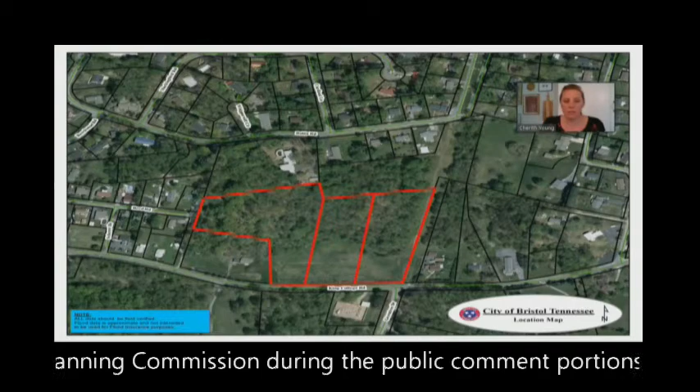The next slide shows the location map. The parcels highlighted in red are the parcels under consideration tonight. This may look a little familiar to you - the Planning Commission approved a subdivision plat for this about 2.5 years ago. So this is 3 of the 5 parcels that were approved by the Planning Commission. The other 2 parcels have been sold to other owners, so we have the 3 parcels in red here tonight for Mr. Taylor's project.

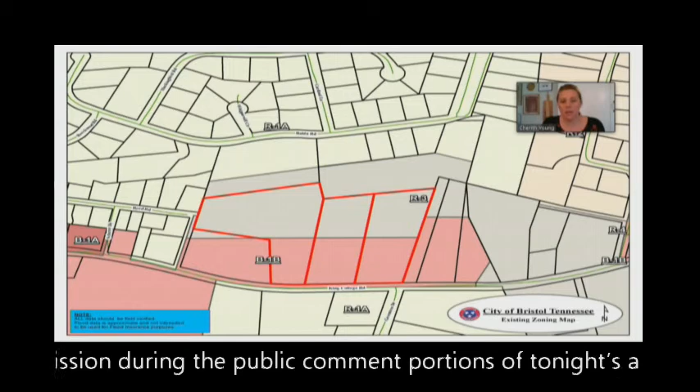The next map shows the zoning of the property, and you'll see that these 3 parcels are split zoned. You have B1B across the front of the property along King College Road, and then R3 in the rear of the properties adjacent to the residential area along Rock. So there is some split zoning here for this project.

The next slide shows the property use and zoning adjacent to these parcels. To the north, R1A, low density residential - single family homes in that subdivision. To the south is R1A, low density single family residential, with the land use being single family residential, and you also have the BTES substation across the street. To the east is zoned B1B and R3, vacant and residential. And to the west, B1B, also a single family residential use on the property to the west.

Just quickly to recap why this is coming to you all as a special use application: this is a commercial zone along the frontage of King College Road, so it's B1B. The B1B district is to accommodate some light commercial and office uses located near residential areas. On the slide, you'll see a summary of some of the permitted uses that would be allowed out there today. So if Mr. Taylor was going to do single family residential, office use, restaurant use, or healthcare uses, those would be allowed today. His process would be to go through the site plan application process and then the building permit process, but those would be permitted uses outright.

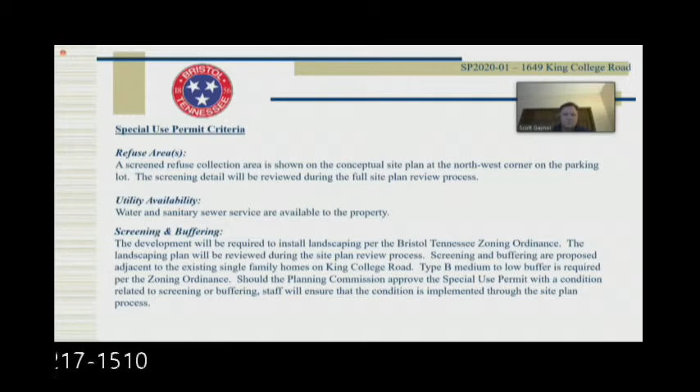As far as utilities go, water and sanitary sewer service are available. For screening and buffering, the zoning ordinance does require screening and buffering on residential uses. The type landscape buffer that the zoning ordinance sets out is called the type B, medium to low buffer option, and that is acknowledged on the concept plan, not in great detail, but they have acknowledged it will be required along those residential property lines.

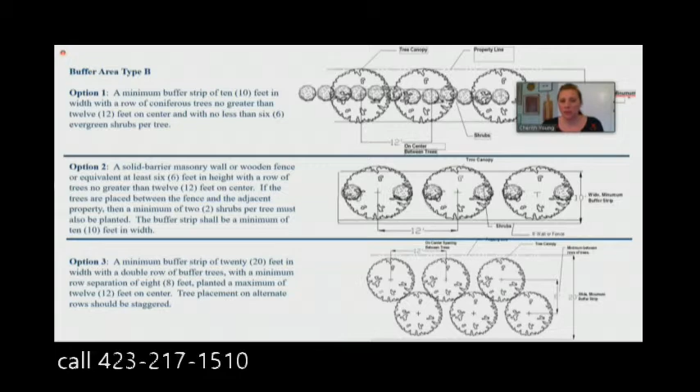Here is a slide that shows what those options are, and you've all seen this a couple times when we looked at special use permit applications. This is one of the areas that the Planning Commission can look at for the special use permit, but the landscaping is required through the site plan application process, and we will be looking to see at a minimum that it meets all the landscaping chapter requirements.

Next is lighting and signage. As part of the site plan package, they will require a photometric plan if any lighting is proposed, and that will have to conform with the city's lighting ordinance.

Setbacks and maximum lot coverage: according to the B1B setback standards, the project does fall within the setbacks allowed in this district, so it meets all the front, side, and rear yard setbacks.

Public notification: we ran a public notification ad on this project in the Bristol Herald Courier on April 1st, 2020. We placed public notification signs on the property, and adjacent property owners were notified by letter, and they were also sent a comment sheet to reply back to us with their opinions, either in favor or opposed to the project.

So we did receive several calls and several emails about this project. Several were just in the nature of 'can you tell me what's going on' - they were curious about the project. We received one of the adjacent property owner letters back that was in favor of this special use application, but we received two correspondences from people within the adjacent property area that were opposed to the project.

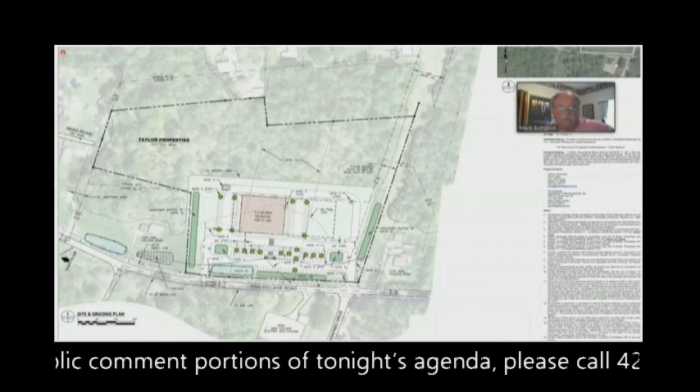That's what I wanted to get out there. So let's turn it over to the Planning Commission to ask any questions of staff. One of the questions I have: the special use permit would be for this only. So if they decided not to do this, do something else, the special use would be null and void, and they couldn't do it unless it fell under the criteria of the zoning that's already there.

Right, so if this is approved or not, and Mr. Taylor sells the property and does not want to pursue this use, he could build a commercial strip center with any of the permitted uses on that list without Planning Commission review.

Mr. Chairman, I have a question. I noticed in the objection somebody was concerned about the right-of-way going up to Forest Hills from King College Road. I see on the site plan there is a right-of-way there. Who owns that right-of-way—is it a city right-of-way or a private right-of-way? There's an existing BTES electrical easement up that side. There's not an active line currently along that property line, but there is an existing electric system easement there.

Could that easement be used for a roadway? I would hope not. Well, it could with the electric system's permission, yes. It could be made into a city street. Well, I don't know—that's a long ways down and would have to look at what the proposed use would be behind there, but it's a possibility if they wanted to subdivide the property behind there and needed to put in a public road or a road to a public standard. That could be a possibility.

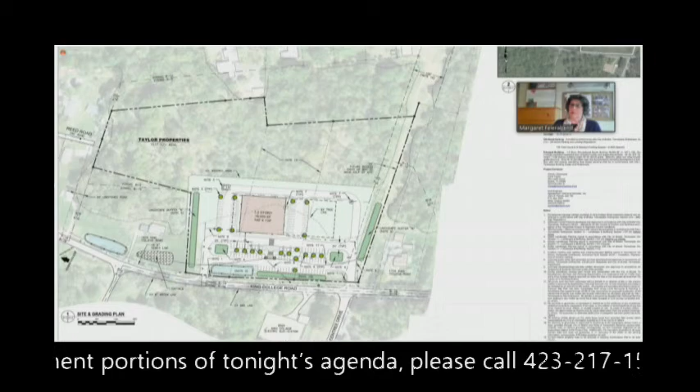But at this point unlikely, correct? That's not requested at this time by the applicant. But they would have to have BTES's approval since they have the right of way, correct? BTES would have to grant permission to put a road or driveway across that easement, yes. Also, that possibility exists whether this is approved or not, is that correct? Correct. So do I not remember that BTES had some high-powered lines going up that easement at one point in time that are no longer there? That is correct.

All right, any other questions at this time? With regards to the letter where they were opposed to something happening to the pond—there's no plans for that pond to go away that I can see right now, is there? Well, regards to drainage and water quality off the proposed site, they would have to meet our current regulations regarding stormwater runoff and water quality, since this site is over 1 acre. So they would have to work, and have been working, with our city engineer on water quality features as well as looking at potential detention for runoff.

Yeah, this is Scott. Along those lines, on the site plan, note 17 is a bit of an eye chart, but it says it's a blue line tributary of Cedar Creek, and I don't see any kind of creek or water feature from the aerials or on the site. So what is that, subterranean—is that just a ditch? What is that? The blue line is USGS, basically drainage ways they put on USGS maps. They call them little blue lines because they indicate drainage areas. That does not mean there is a stream there; it just means they consider that a drainage way.

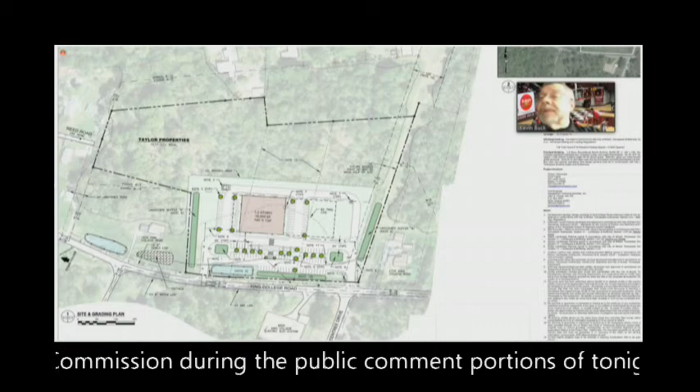Without any other questions for staff right now, what we will do is ask the folks that are part to address the Planning Commission. Then after we do that, we'll come back and look for a motion unless there are other comments we need to clarify. So who do we have first?

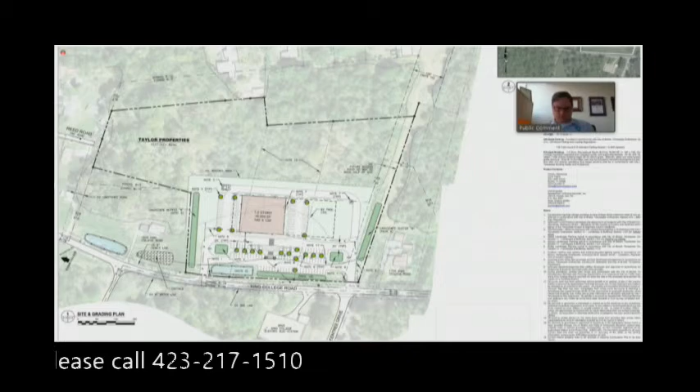Whether it's a special use permit, right? Whether it's a special use permit or just any development, be it subdivision or commercial or industrial, any development. Yeah, right. Okay, please go ahead.

Another concern I have is with what would happen to my property value. Personally, I wouldn't want to live next to a development of that sort, and I've got small children, dogs, wildlife, and whatnot. Anyway, I cannot see this not negatively affecting my property value to the point that I would be stuck here, because who would want to live next to that? So that's another one of my big concerns.

And then there's, like Miss Wright mentioned, the wildlife that lives in these woods. Anybody that drives through here in the morning could tell you there's 20 to 30 deer out here 4 or 5 times a week. We've got raccoons, coyotes I've seen. There's just an abundance of wildlife. We've got great blue herons in here, things of that sort.

But mostly the two biggest for me would be my property value and the sheer amount of water that would run off of that parking lot and the facility itself. Water drains downhill, and I am downhill. So I'm really more interested in what the water retention and detention systems would be.

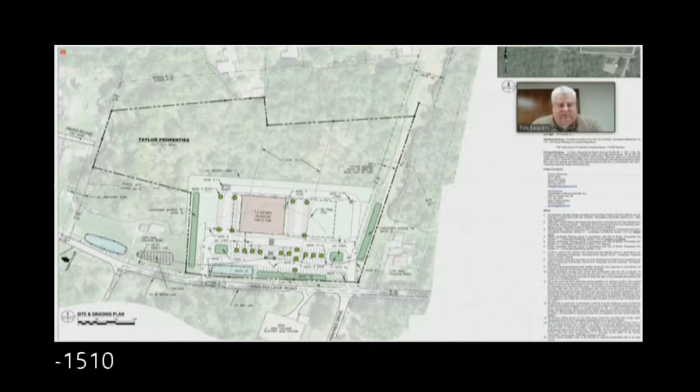So I think that in the event of a Dave and Buster's, we'd probably just have to take it case by case. A Dave and Buster's would have a big restaurant component, a big food component, and they might fall under restaurant and they might fall under sports club.

I've thought a lot about why this is listed the way it is in the special use permit list. A sports club and how it impacts the residential area would be a lot like if it was tennis courts outside - do they have lights, are they going to have play at night, are neighbors going to have to listen to the whack of tennis rackets all day long? This one is indoors, so you're not going to have extra light, or again back to that criteria of what the planning commission looks at - you're not going to have those concerns at play. I understand the neighbors' concerns, but from the special use permit thought, you're not going to have those noise or light concerns.

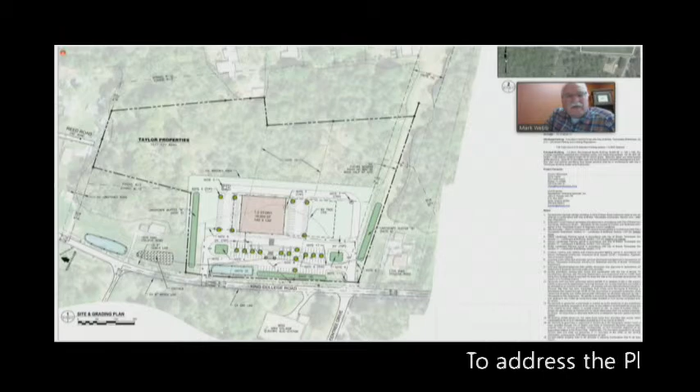Correct. I also see to the right of the middle parking lot an open space - I didn't know if activities would be conducted outside in that area. Another question I have: what kind of design standards or materials are we talking about this building being built out of? I mean, we're not talking about a two-story metal building, are we?

I think, Mr. Chairman, the way to address some of Mark's questions would be after the public has had their input, to ask those questions to the developer and his architect and engineer. That would probably be most helpful there, so we don't keep the public on hold waiting.

All right, Tim, I have one question. With regards to Mr. Baker's concerns of the water runoff, I know we have mitigation plans - is there an assurance we could give him that he should not have that concern, that it should be taken care of?

Currently we regulate the 2 and 10-year events in normal runoff. The peak flow from a 2 and 10-year storm should not be different than the peak flow prior to development, so they have to be equal or less. We do not regulate the 100-year event currently, except in floodplains. We look at development in flood zones, but we do not require detention of anything more than the 2 and 10-year event, and those are your most frequent storm events.

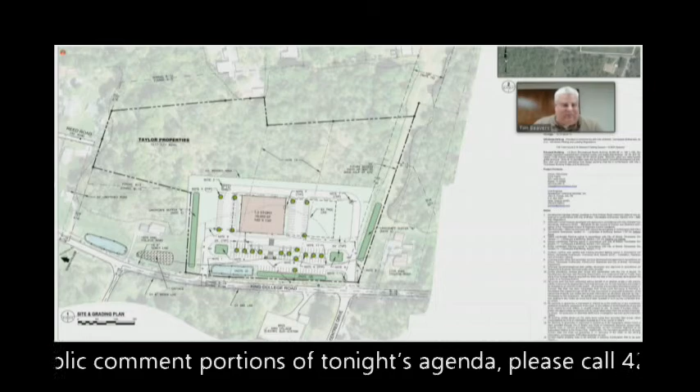So that's what we look at: peak flow from a development. When it crosses that property line, that peak flow has to be as is currently or less into the downstream properties, and it also has to cross the property line in a similar fashion. I can't concentrate it all at one point. If it's currently spread out over a 10-foot wide area, I can't neck it down to 1 or 2 feet of flow. So we have two criteria for the 2 and 10-year storm: one, the peak flow, and two, how that flow mimics what's currently going across the property line.

On top of that, we have water quality standards for the 1-inch rainfall—really a different number, I think 1.04 inches or something, I can't remember off the top of my head—that they'll have to run through. That's your first flush of pollutants coming off parking lots and buildings. They will have to design a water quality feature that removes 80% of the total suspended solids from that runoff, and typically pollution attaches to those suspended solids for downstream purposes. So that's our criteria for water quality in a nutshell, without getting too technical.

All right, let's do this. Did that help, Mr. Baker?

A little. I wish I could see the actual plan for what it would be, but I understand the regulations and things that have to be met. I just, as far as the water's concerned—

When it comes to our property value, we are in a situation where we have small children. This isn't the sort of facility we would want to live next door to. That's a lot of people coming and going, and an eyesore—a massive eyesore. For me, it jeopardizes the quality of safety I can provide to my kids with that many people right there beside my house. So I wouldn't want to live next to this.

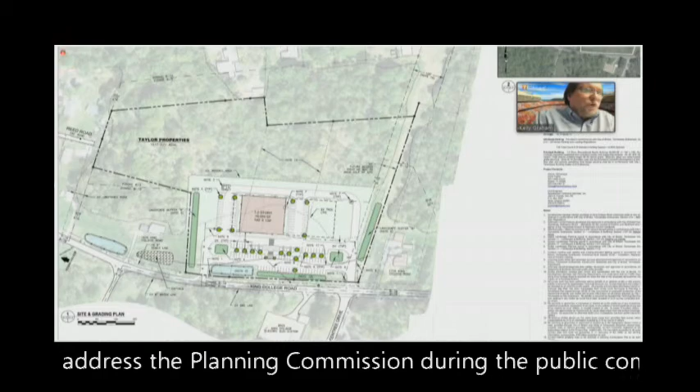Hi, my name is Ann Rife, and my husband is here, Brian Rife, and we are at 300 Robin Road, which is in the subdivision behind the subject property. All right, what we do is let you address us with anything you want, and then planning commission members will ask you questions. So tell us what you've got to say, and then we'll ask some questions.

Okay, thank you, sir, for allowing us to participate by phone. I first want to mention that we've been attending this meeting since prior to 6 p.m. through YouTube Live, and we've only been able to hear maybe 20% of what was said during the meeting. We do not have access to the BTS broadcast, so this was our only option for participation.

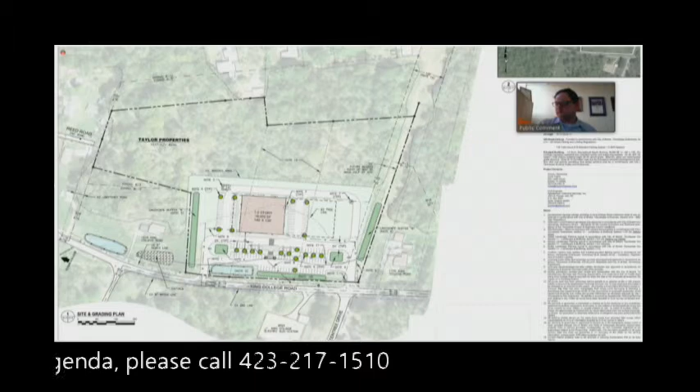Under the zoning ordinance, chapter 2, section 217, it states that a public hearing shall be held for any special permit application where any party may appear in person. I understand COVID-19 accommodations, but I do not believe a hearing where only 20% of what is said can be received by the public could be considered a public hearing. Therefore, we would respectfully request that this issue, particularly since it's contested, be tabled at this time until a public hearing can occur.

Additionally, I'd like to point out that on the original notice that was provided, and also in the report to the Planning Commission that was provided to me through a FOIA request, it indicates that there are 4 parcels implicated in the special use permit application, including parcel 10.40. That parcel is not owned by Chris Taylor, it's owned by another family. So the notice provided for the public hearing was incorrect and led to quite a bit of confusion for us as we were preparing for comment. So again, we would respectfully ask that this issue be tabled for a public hearing.

All right, is there anything else that you want to say or request at this point in time before planning commission members discuss this with you?

Yes, we would also, if the planning commission decides to move forward with this, ask that the special use permit, if allowed, be very limited to the site plan proposed by Mr. Taylor and not be extended into the R3 area behind it. And the wooded hillside be left intact. We also ask that safety considerations be made in terms of any parking or areas for congregation behind the 18,000 square foot building proposed.

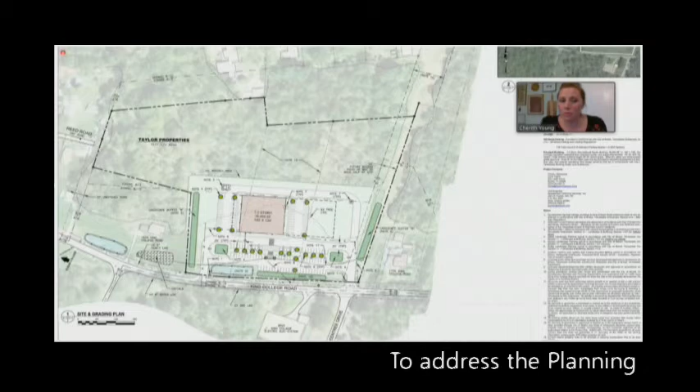So can staff address the discrepancy in the parcels? I actually noticed that and forgot it. Gareth, you gonna address that? Yeah, I'll have to look back. To be honest with you, I don't have it. I guess you're referring to the ad, or are you referring to the staff report? Well, I can tell you, it's on the cover sheet of the tax ID. It says 4 parcels, and we're showing 3. So that's a bit confusing.

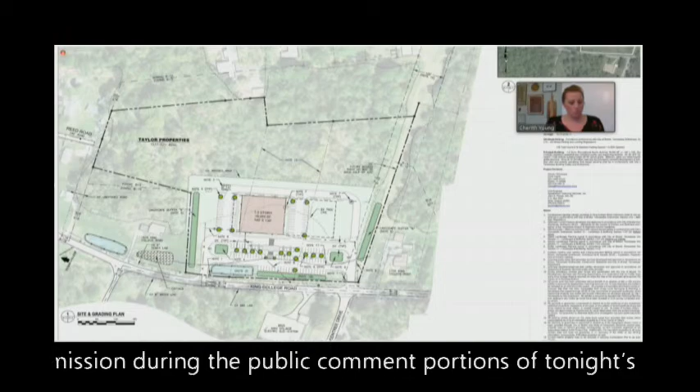Yeah, I understand that, and I apologize. That one's my mistake, but it should just be the 3 parcel numbers listed. So that shouldn't, all that is shown on the concept plan is all that's involved in this application. So on the staff report, I apologize, that's me. Okay, so it's just point 1, point 2, and point 3 then, right? Just the 3 parcels. Yes. Point 4 is not involved. Yeah, thank you, and that's just an error.

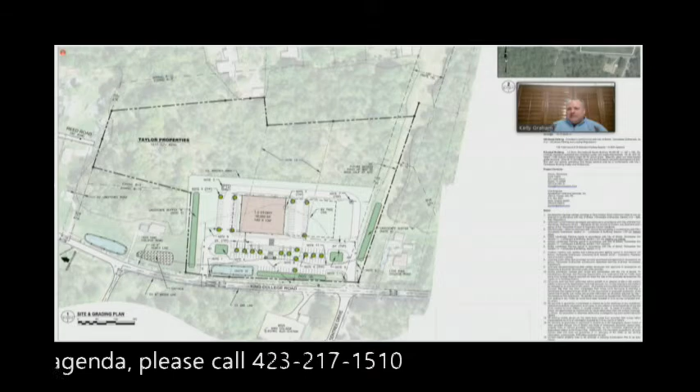I'd like to introduce myself. I'm Chris Taylor. Thank you all for having us be part of this tonight. There's a lot of speculation about what this gym is and what we're trying to do. There are several travel leagues and clubs in the basketball and volleyball arenas in this area, and my focus is to grow and develop a place for our youth to have a home base. That's the goal. No Dave and Buster's — the gym is for our youth, to develop them and give them a home base for these sports.

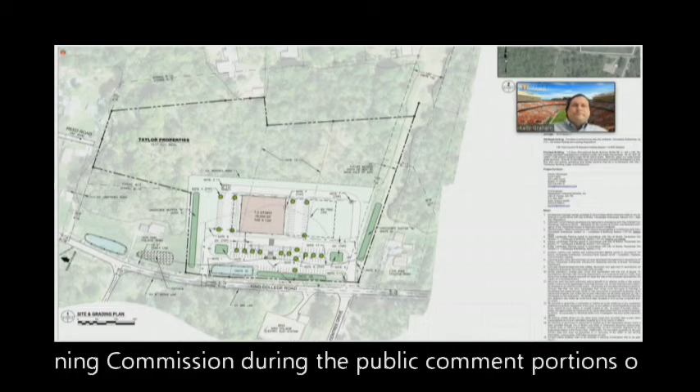Chris, is the configuration of this facility going to be volleyball only, or is there any way to use it for other sports? No sir, it'll be multifaceted with basketball too — basketball and volleyball, possibly some weights, but again, centralized around the youth.

I've got a question about the number of parking places, which exceeds what's required. What have you calculated parking spaces on to determine how many you want to have? It depends — a club could average anywhere between 80 and 120. So if one club is practicing from ten years up, you could have everyone in there training at the same times, the same nights or days. So yeah, I'm thinking that.

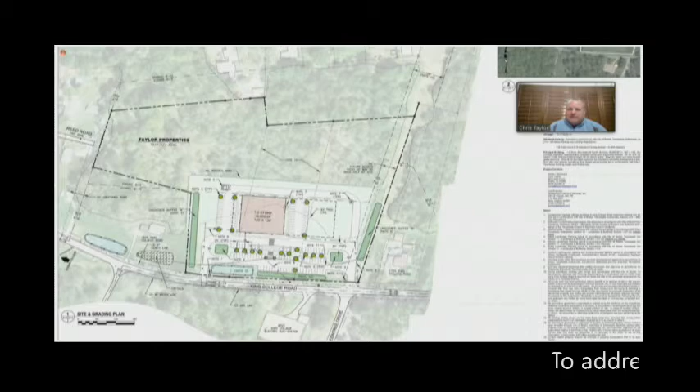So you could anticipate a lot of traffic, vehicles coming in and out? No more than the parking spots, I guess. King College has more traffic than Virginia Avenue — they're both heavily trafficked areas throughout the day and night.

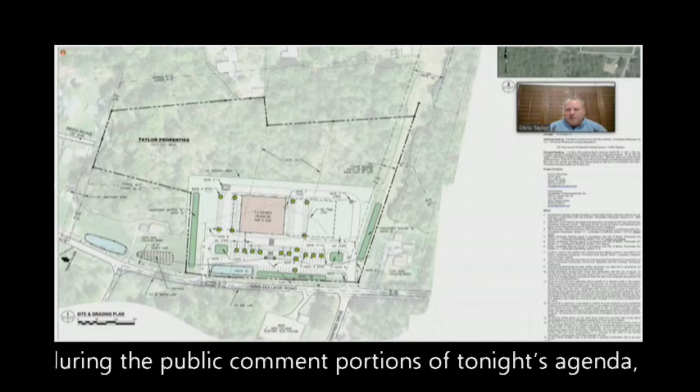Chris, is this going to be like FC Dallas soccer, where you've got younger kids up to college levels practicing and playing games? Yes sir. And like Tim alluded earlier, it could be for adults too — there's limited space for basketball clubs or pickup games, so I'm trying to focus on that as well. But the core of my strategy would be the youth, to have a place they can call their home to practice. There are limited places in the area for them to practice.

Mr. Taylor, this is Takai — is it anticipated that this facility would be up and running year round? Yes. All right.

What other questions do we have? Mr. Chairman, this is Mark — do we still not know how this is going to be constructed, and what materials play into here? Let's go ahead and get John Ponish in here since he's the architect engineer, and John, if you would address that.

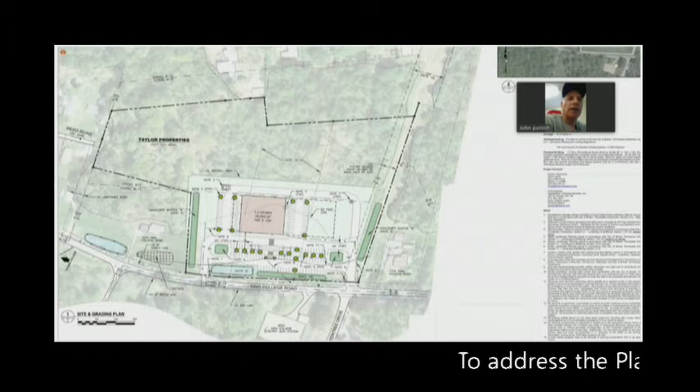Okay, I think the question — am I clear to everybody? Yes. I think the question is regarding the building. What I want to do is reference the ordinance, in chapter 4, business, section 408, planned development area overlay, subsection 4 — specifically this, and the concerns you all outlined regarding exterior materials. You're very clear, and the city has pointed that out from the beginning, and from everything Mr. Taylor and I have discussed... excuse me, I'm sorry, I'm getting like every third word there, and a lot of feedback.

Yeah John, do you have some sort of speaker on or something that's causing feedback? He just muted.

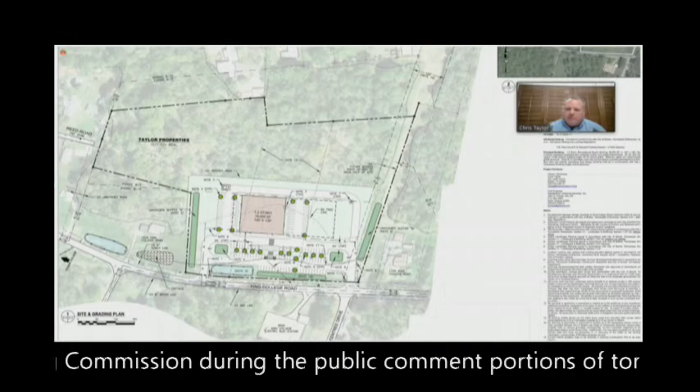Okay, well, let's ask Chris this. Chris, if you'd go ahead and take it up as to what type of construction you're going to have on the building, et cetera. Yeah, we're looking at — can y'all still hear me? Okay. Regarding the components of the building, it would be a mixture of steel, block, and glass. We want to make it an aesthetically sound building structure, versus just a straight metal building, as someone had mentioned earlier.

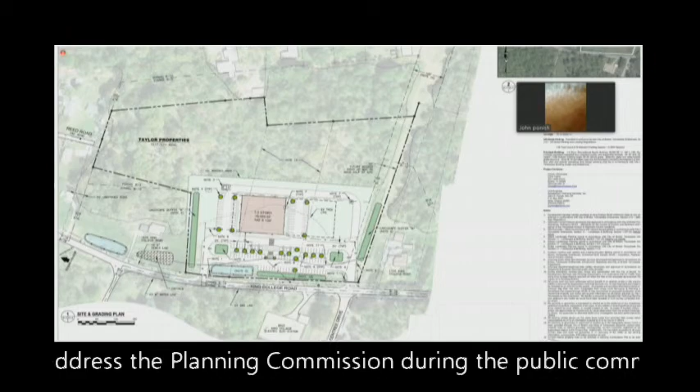Mr. Chairman, our current design standards for B1B limit certain materials. You cannot use rib metal siding, plain unpainted block, unpainted concrete block, cinder block, or single sheet corrugated metal. So they would have to meet those building material requirements under our current regulations.

All right, any other questions at this time? I think the concern about the malfunctioning of our TV channel is a legitimate concern, that the public has not been able to follow as well as we would hope. So I would like to think about tabling this and seeing if, when we do another call, we get better reception to cover the issue at that time. That's out for discussion. I'm not making a motion yet.

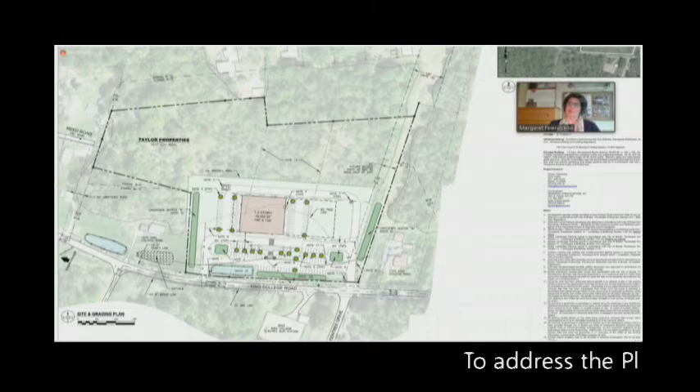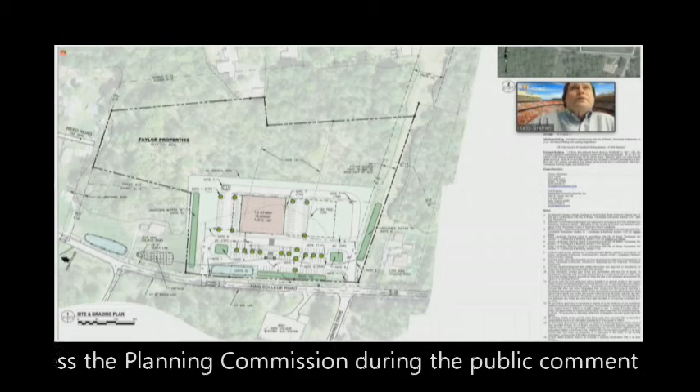There's discussion from one of the planning commission members. I'm going to turn to our legal counsel and ask if we have a legitimate meeting here, even though there was some issue with the YouTube. I don't think there's an issue on the BTES channel. I think it was only YouTube that they made reference to.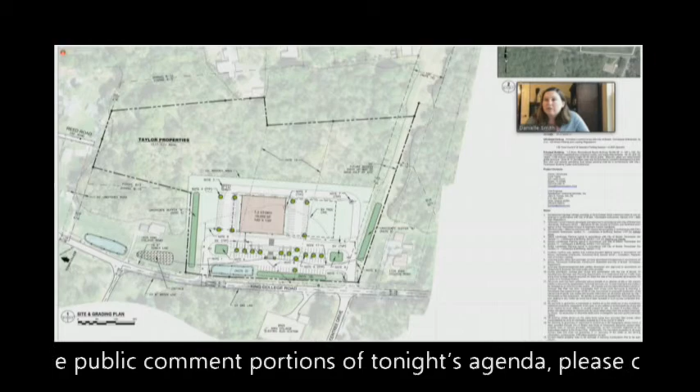Mr. Chairman, I don't think it's a matter of not having a legitimate meeting. I think the issue is that maybe the public hearing has not happened the way it should have, because if we've got people who were not able to hear other people's comments and hear the planning commission's questions and discussion, then that raises some problems for the public hearing itself, even if the meeting is compliant with the Open Meetings Act as the governor's order has allowed. So I would share Mayor Feierabend's concerns here.

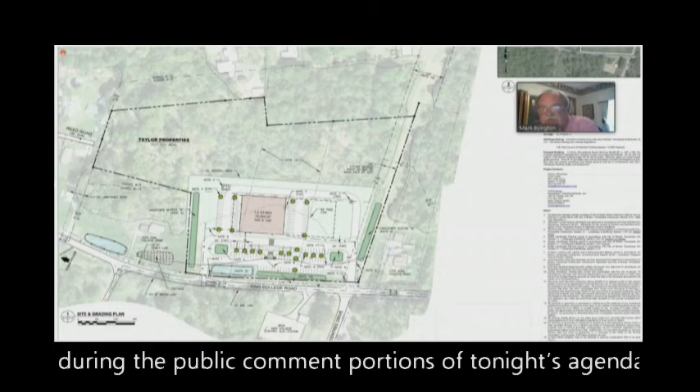Mr. Chairman, to that end, I would move that we table this issue until we can have a public in-person meeting. I'll second it. But wouldn't that mean everything on the agenda, not just this one item? I agree, Mr. Byington, because the other items on the agenda are not public hearings. I don't believe there's anything else that requires a public hearing tonight. It's just the regular meeting, which is required to be open to the public, but it does not have to have public participation the way a public hearing does.

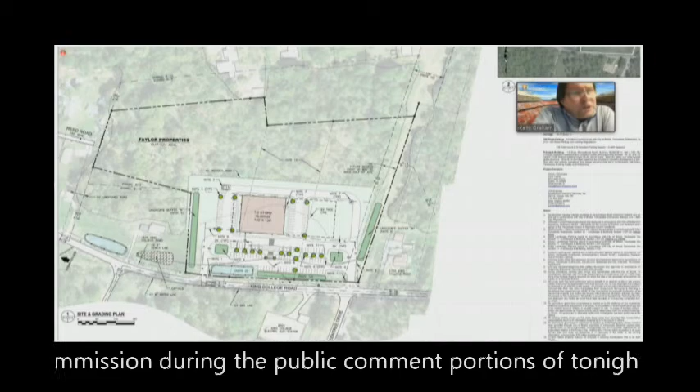There is a motion on the table to table this. Give me that motion again. Was that for the rest of the meeting or just merely this public hearing? That was merely this public hearing. All right, this issue. So we're open to discussion because we have a motion and a second. Let's discuss it. What do you guys want to do?

I feel like, since it was brought up as an issue, we did have some errors, and probably should table it for now.

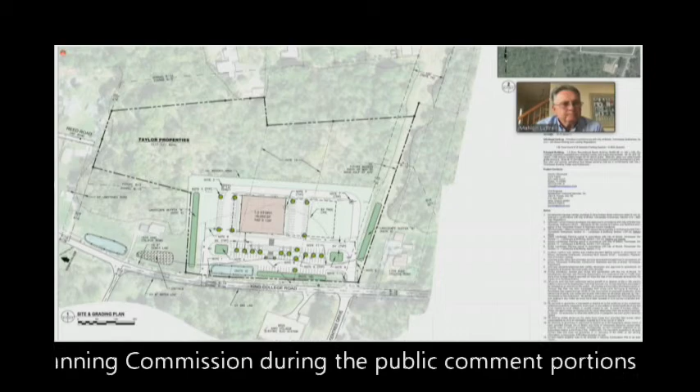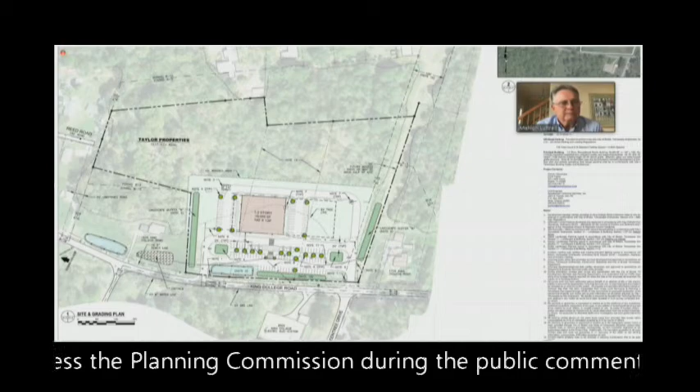Has anyone verified that the audio on YouTube is not working? Yeah, I think everything was fine on BTES. It was on YouTube, but as the lady presented, I guess we're incumbent to follow those guidelines pretty strictly and make sure everyone has access to the meeting. And apparently, because of her issue of not having BTES out there, that's probably legitimate. Well, I'm just asking, has anybody from our IT people verified that the YouTube channel isn't working properly? Yes. No, we're seeing audio. I'm sorry, come back on that. YouTube seems to be working.

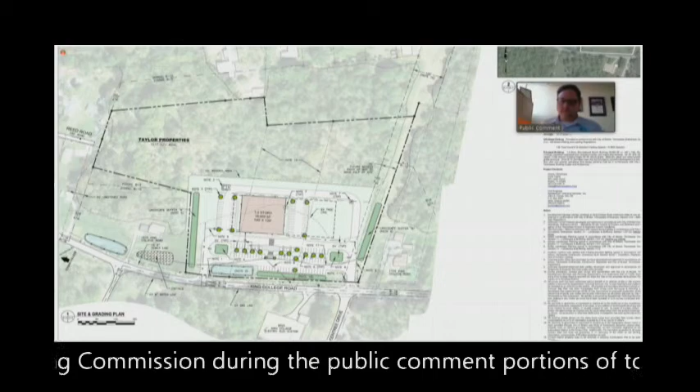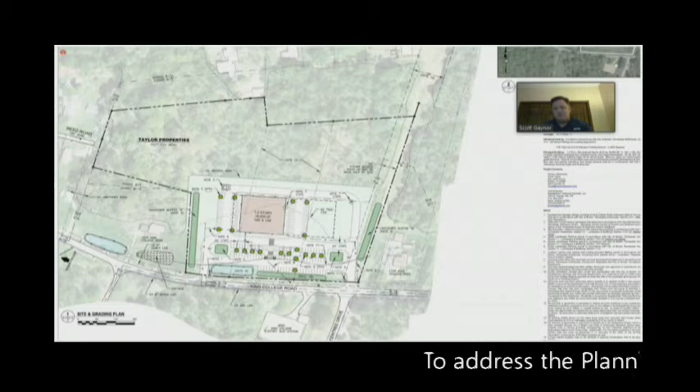It's one of those things I would like to have a playback on, but I don't guess that's going to work. How y'all want to handle this? Any discussion? You want me to call for the motion? I'm just going to say, Scott, I don't know how we could say that just this one and not everything. I understand the legal side, but if you're saying people can't hear it, then there's really not much point. And if our IT folks are saying the YouTube feed is working, then I don't know. I kind of agree with Scott. Meaning, if we can't do this one, how can we do the rest of them? Okay.

All right, we've got a motion and a second on the table to table this public hearing about the special use permit. Is there any other discussion on the motion that's on the table?

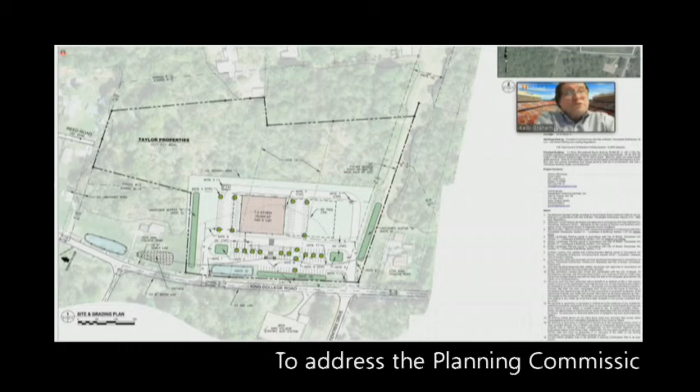Okay, I'm going to call for a roll call. If you vote yes, you're voting to table this portion of the meeting. If you vote no, you're voting to press on tonight.

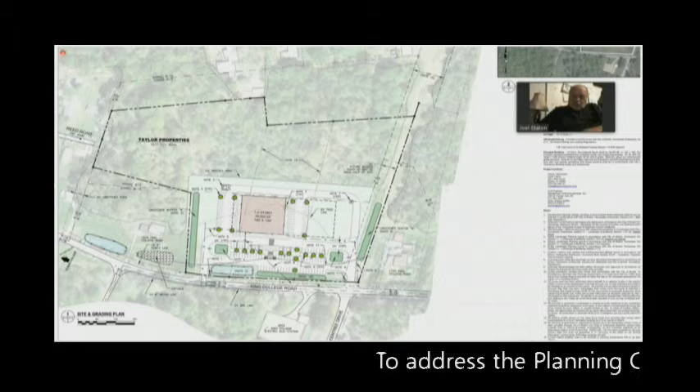Roll call. Kelly Graham, yes. Alan Luttrell, yes. Joel Staton, yes. Mark Byington, no. Kevin Buck, yes. Scott Gaynor, no. Shu, yes. Mark Webb, yes. Margaret Feierabend, yes.

This portion of tonight's planning commission meeting has been tabled. What we will then do is look at our agenda and go to the next item. The next item on the agenda is the subdivision regulations waiver request.

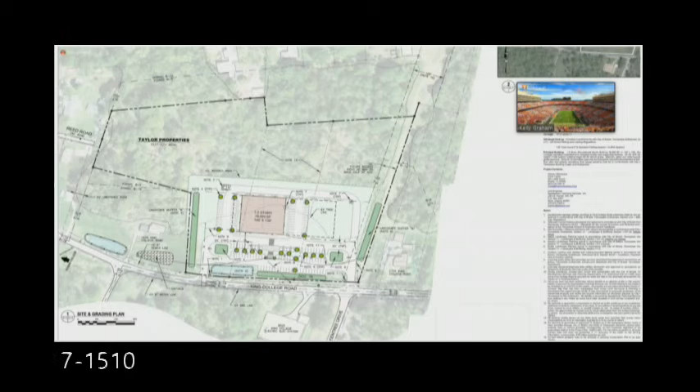Before we get started, is there a motion? Well, I'm confused now—are we not having public comments or public input? You're talking about item B? Well, I guess B, C, and D, right? What I was calling for was to see if anybody was going to make a motion to table the rest of the meeting, and not hearing one, we're going to press on with B, C, and D, because there's been no motion on those.

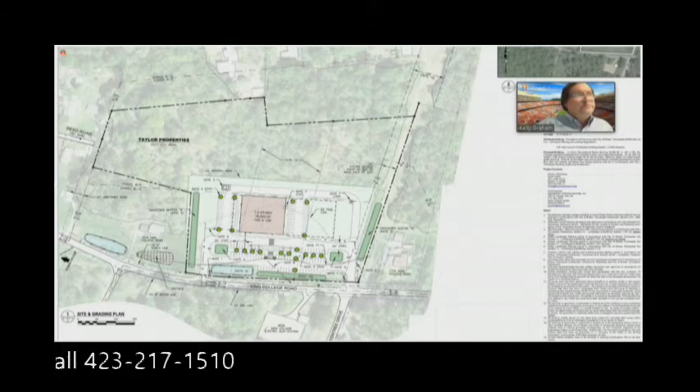Motion? None? All right, staff.

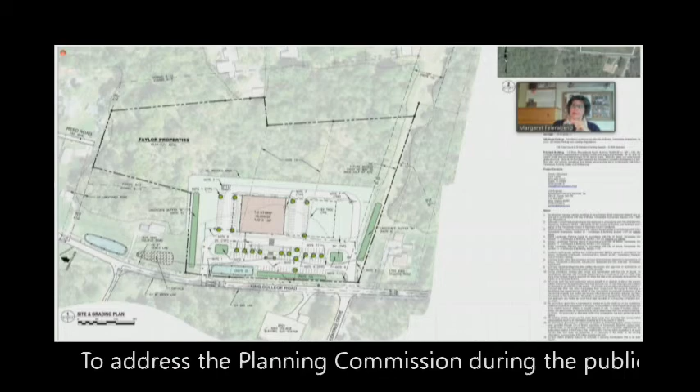New business B. Mr. Chairman, while y'all start, I'm going to disappear for a minute. I need to make a phone call, so I apologize. I'll come back in just a minute. Thanks, ma'am.

Yes, Mr. Chairman, up for your consideration, the next item is a waiver request—let me get to the right slide here, sorry. Click through that. Actually, your next item in the slideshow—I don't know what happened here, I probably clicked through wrong. If you want to take them out of order, please do. Oh, here we go, I just hit the wrong button. Sorry about that.

Next item for consideration is a subdivision waiver request for replat of the Roger Colvin Jr. property. The waiver concerns our subdivision requirement of a minimum 50-foot road frontage when subdividing a lot. This property, wanting to subdivide into 3 lots, would not meet that required road frontage. With that, I'll let Cherith Young start the conversation and discussion.

Thank you all. Again, as Mr. Beaver said, Roger Colvin Jr. is the applicant here with this waiver request. The address is 1561 Bristol Caverns Highway. The property is zoned Sullivan County A1, and the request is for a lot frontage waiver from the City of Bristol subdivision regulations.

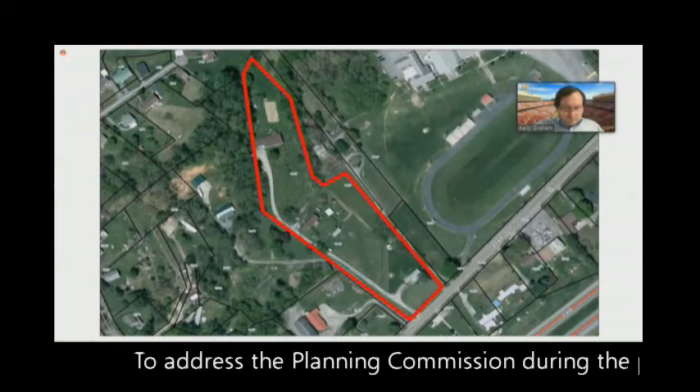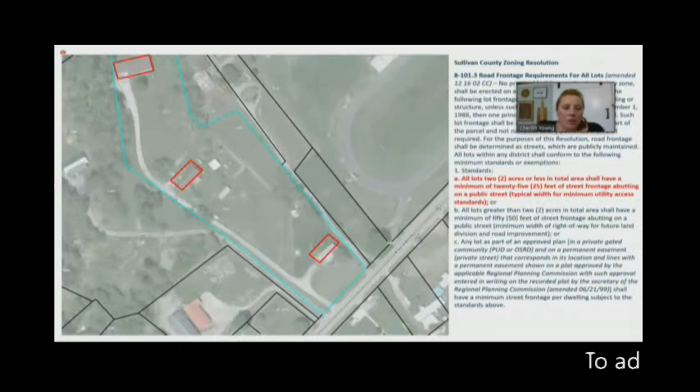The next slide shows the plat—it's hard to see, but you have a copy in your packet of materials. The plat request is to subdivide into 3 parcels, so each structure on the property would have its own lot, which is important to them for a lot of reasons. The desire is to have each home on its own parcel. If you skip to the next slide, you can see the parcels outlined in blue and each home outlined in red. And here's where we get into a bit of a mismatch.

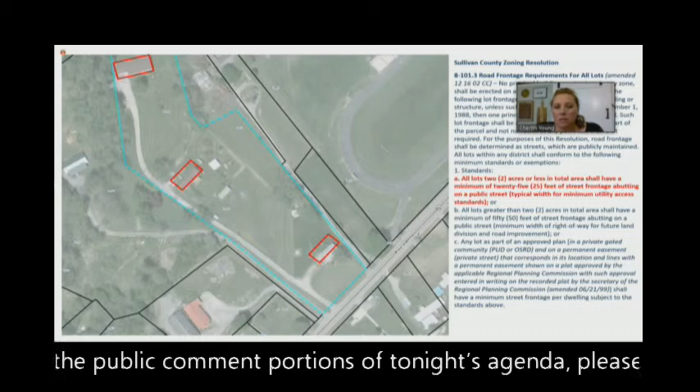The Sullivan County zoning ordinance allows—and this is shown in red—that all lots 2 acres or less in total area shall have a minimum of 25 feet of street frontage abutting on a public street. This property, as it is right now, has 132 feet of road frontage, so they can subdivide it and still meet the Sullivan County zoning regulations.

If you'll flip to the next slide, please—this is the same image, but with an excerpt of the City of Bristol subdivision regulations. Down in red, it states that the minimum lot frontage on a public way in the City of Bristol must be 50 feet. So there's a mismatch between what the Sullivan County zoning resolution allows and what the City of Bristol subdivision regulations require. In case I didn't say it at the start, the reason this is coming to you all is that this property is within the city's urban boundary, so the plat has to be processed through the City of Bristol.

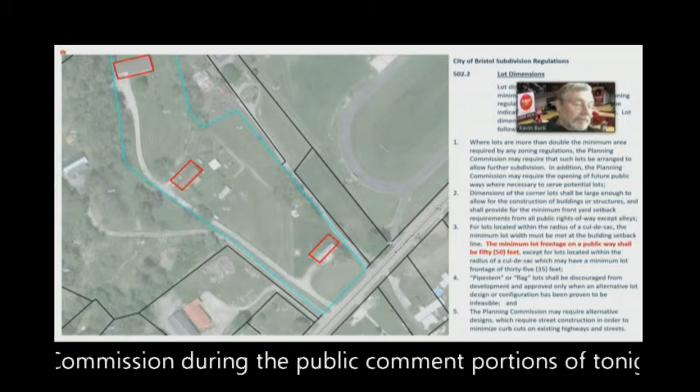Amber Torbett, the planning director with Sullivan County, has reviewed this request, and she does recommend that a waiver be granted to allow it to subdivide into 3 lots. Her zoning resolution requires and allows only 1 primary structure on a parcel of land.

We don't find that the request meets the criteria listed above. We can support a 2-lot subdivision, but we don't recommend, or can't recommend, deviation from the road frontage requirement to allow a 3-lot division based on these items.

So if anybody has any questions, I'd be happy to answer them. I know we have Mr. Robert Colvin and his niece on the Zoom call with us, I believe, so they can answer some more questions about the situation and what their issues are. All right, we'll bring them on in one minute. Any questions we have of staff, please?

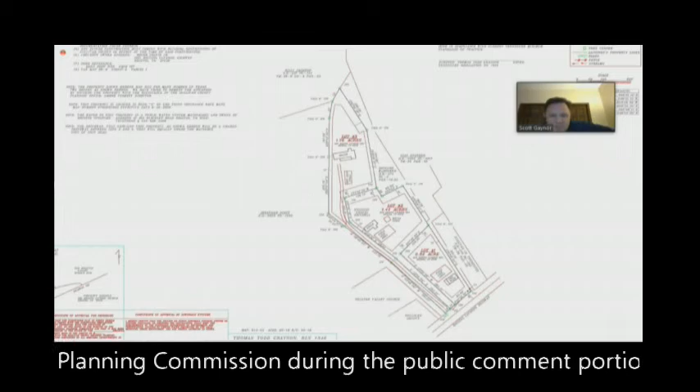Right, so if you go back to the plat, Tim, if you don't mind scrolling back, so if you look down, kind of at the road frontage here, what they're proposing to do is split this into 3 lots, 2 of which would have 25 feet, and the third lot would have the remainder, I think it's 86. Oh, okay. So I'm looking at, okay, so it's 2 flag lots and then another one in the front, right? That's what we're saying, correct.

And the zoning in Sullivan County allows that so long as the lots aren't more than 2 acres. Okay, but the city subdivision regulations don't have an exception for that. Okay, all right, I got it now. All those lines running together got me confused. Okay, thank you, I appreciate it.

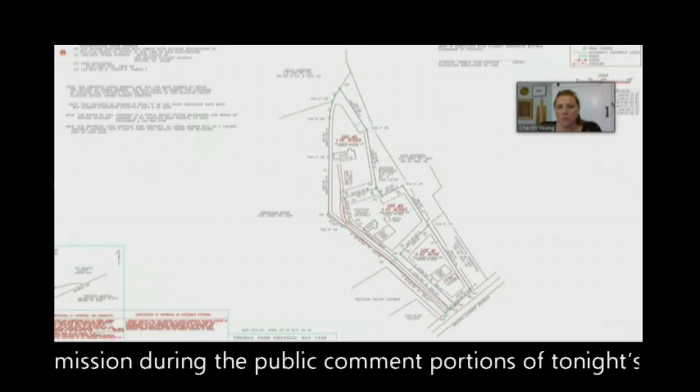Typically in this situation, we encourage people to look at adjacent properties to see if there's any way to purchase property to meet the regulations. But if you go back to that aerial image, Tim, 2 slides forward maybe, you'll see there's not a lot—the lots on either side don't really have any frontage to give themselves. They're sitting at those minimum standards as well.

As we speak, you've got 3 houses on 1 lot? Correct, right. And the two were built in right around 1970, and then I think Mr. Colvin can probably provide exact dates, but 2 were built some years ago, and then the home closest to Bristol Caverns Highway came in the 90s. So 2 of those predate the Sullivan County zoning ordinance, which kind of explains how this situation has come to be.

Yeah, and then that property to the left has a real small frontage too, correct? It does, both properties on either side do. So the option to obtain some frontage to meet the requirements from the neighbors is not there.

Dr. Webb, I'm curious about something. In your position as chairman of the Sullivan County Planning Commission, if this was up to that commission, how do you think it would be handled?

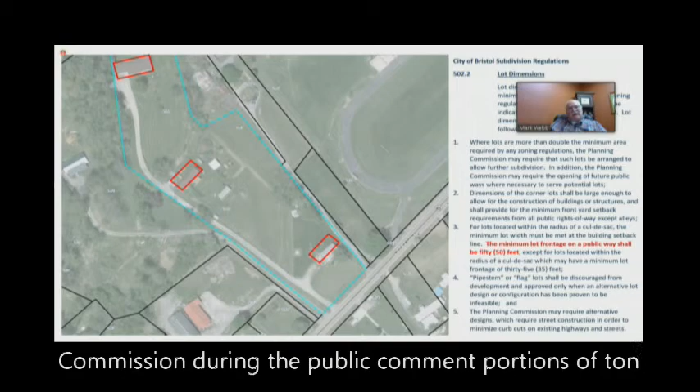I think, well it's hard for me to say for the whole planning commission, but my opinion is grant the waiver. These spots are all over the county - you have acreage where the original house was on the road, then a relative builds behind, another relative builds, and it comes down to wanting to subdivide all these lots for tax and insurance reasons. Unfortunately it's something that's got to be faced and taken care of.

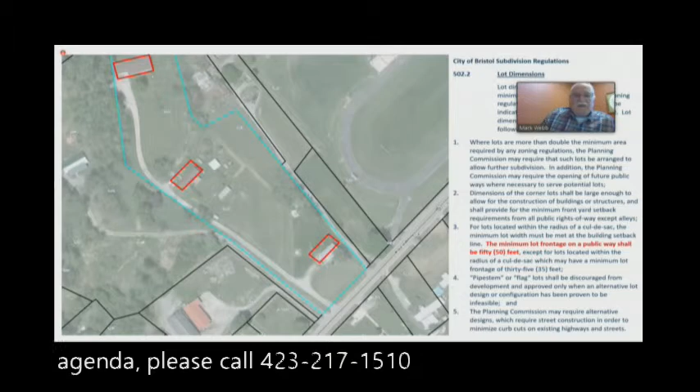Have you all had this situation presented before on something that wasn't in our growth area? I cannot recall, for sure. But my opinion says grant the waiver because the access will stay the same. It's purely for other reasons that this has to occur.

All right, other discussion. Kevin, I can see you. We have no reason to assume these lots will all stay in the same family - they may change hands, in which case you could end up with a derelict lot without enough frontage for viability. I assume that is the reason for the 50-foot minimum standard. I would have to agree with that as well.

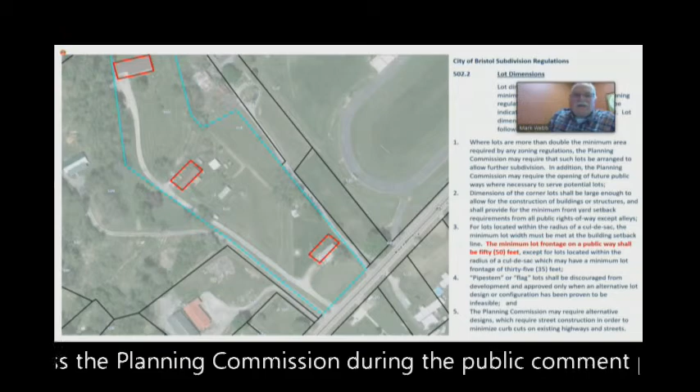So what you guys are lobbying for is to grant it because you think that'd be beneficial to the landowners and just the way it'll go down - is that what you're saying? I cannot see 150 feet of unused property just to put 3 driveways in. Okay.

Is there, before we bring in the folks that have petitioned us for this, any other discussion with Planning Commission and staff at this time? All right, hearing and seeing none. Looking at my list of participants, we have the Cloyds on here, as I understand. Is that correct? Yes. All right, if you would be so kind as to bring them in.

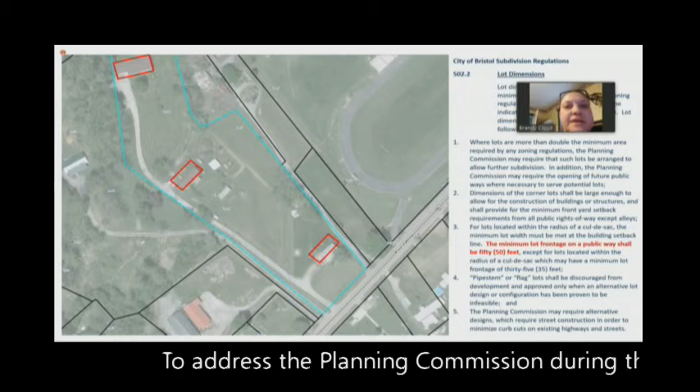I reckon we're here. Can you hear us? Yes. First thing we need you to do, please, is give us your name and address for the record for the minutes. My name is Brandy Cloyd, my address is 1655 Bristol Caverns Highway, Bristol, Tennessee, 37620. My name is Roger Colvin Jr., I live at 1651 Bristol Caverns Highway, same zip code. And then also we have 1649, also Bristol Caverns Highway up front.

Very good. I'm going to turn to the Planning Commission and ask if you all have questions of them, please. We don't have any. Anybody in the Planning Commission that would like to ask them any questions? I can explain the reason we did this if you want. Please. I have 3 nieces, and I'm going to leave a piece to each one of them. So you're the current owner of the entire tract? Yes, sir.

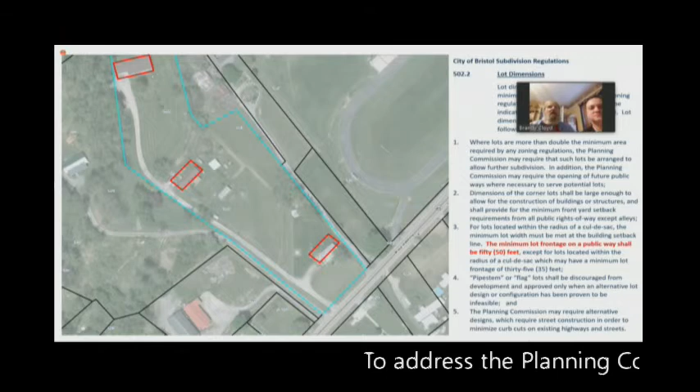I spent 22 years in the Navy. I bought this when I joined the Navy, and after I retired we came home, and now I want to give it to the girls so that they can have their thing. It's family owned, bought so that we could all live close together. Are there any questions from Planning Commission? None from me.

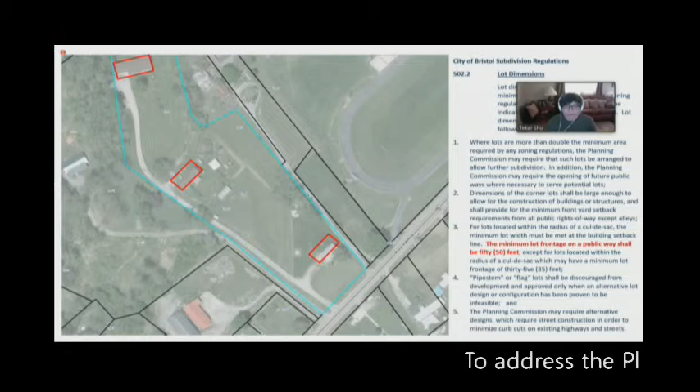All right, then that being said, we'll bring it back to the Planning Commission and look for a motion. I make the motion that we approve the lot frontage waiver request. I second that. Joel, did you get the maker of the motion and the second? Yes sir, I did. All right, we have a motion on the floor that has been properly seconded. Is there any discussion on the motion?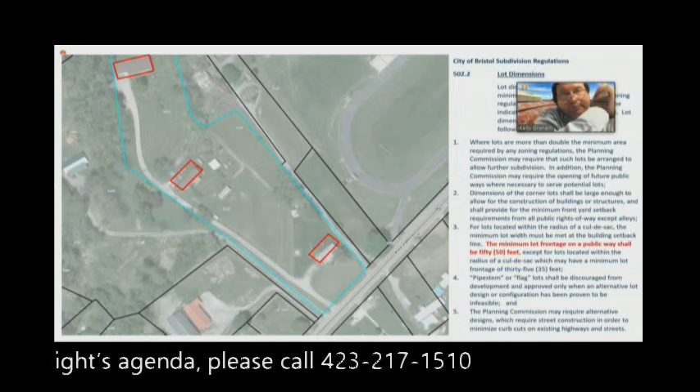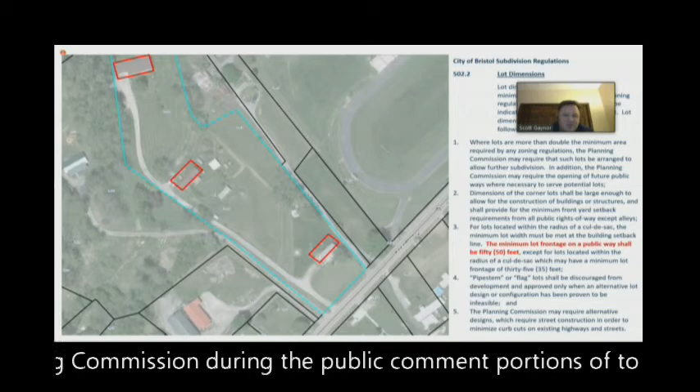I just don't see any way to rectify it other than to say it's going to be one property with 3 houses, and I think what Dr. Webb said was correct - there's going to be places like this, and really the only solution is to make these lots with small frontage.

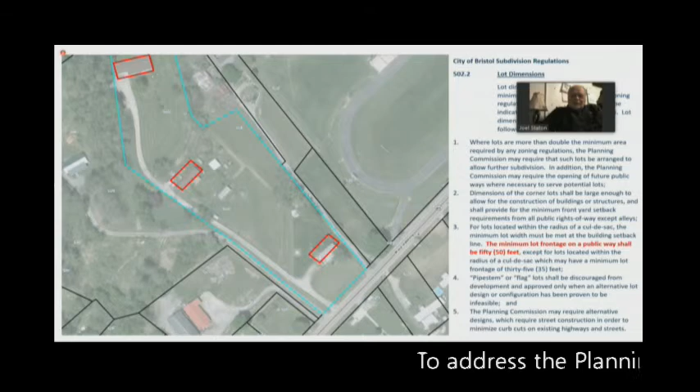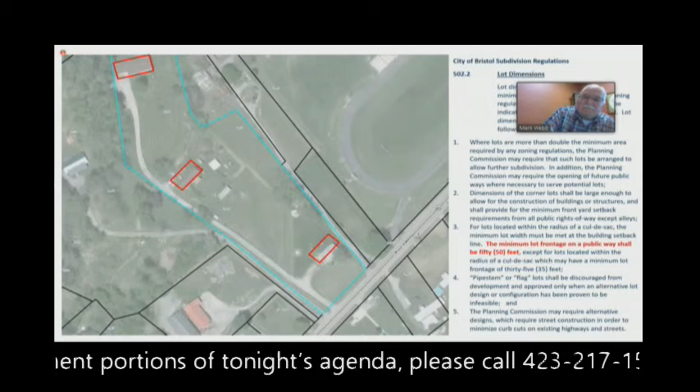Okay, the motion is on the table. If you're voting yes, you're voting to give the waiver, which is opposite of what our planning staff said. Roll call: Kelly Graham, yes. Malin Luttrell, yes. Joel Staton, yes. Mark Byington, yes. Kevin Buck, no. Scott Gaynor, yes. Takai Shu, yes. Mark Webb, yes. Margaret Feierabend - I apologize, I'm going to abstain since I missed a good bit of the discussion, so I abstain. Okay, motion passes, sir.

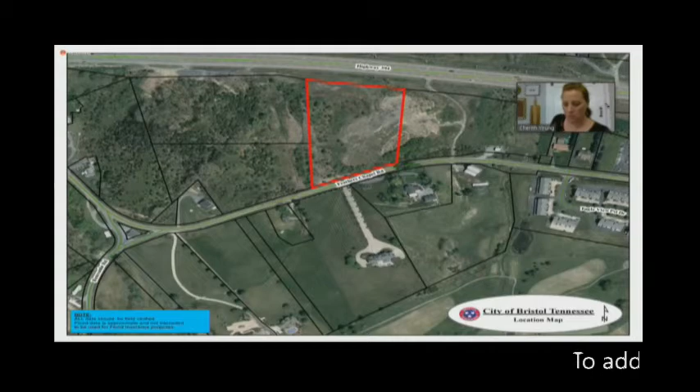I apologize, but I got a little flashing message that said move closer to the... Yes, I think she's having some wireless troubles right now, but I can go ahead until she chimes back in.

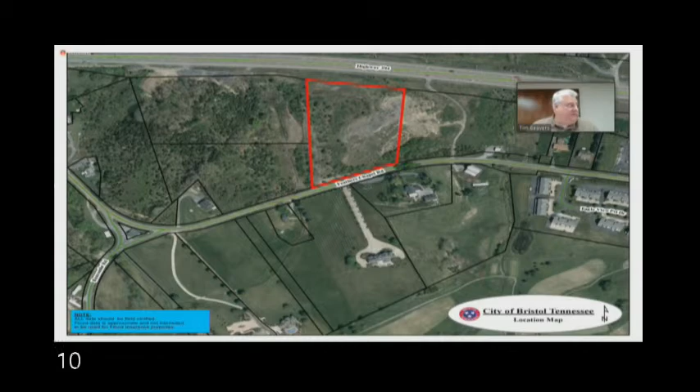This slide shows the lot where the development will be located. It will be on the Highway 394 side, the top part of the screen. To the back, you see Feathers Chapel Road, but the development itself, when we get to the site plan, will front on the Highway 394 corridor.

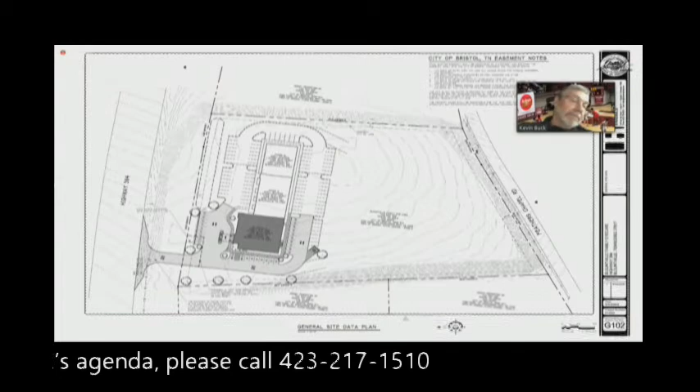You will see the eye clinic at the bottom, the darker gray - excuse me as I look over to another TV to see the slide - it's the darker gray toward the bottom. That's the proposed eye clinic, and there are some proposed phase 2 and phase 3 buildings that might go up in this strip center.

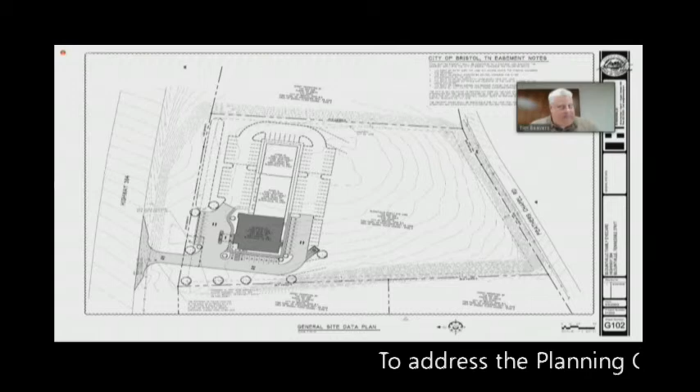You can see the entrance off of Highway 394, and you received in your packets an access easement study showing that this location, even though it doesn't meet the 550-foot requirement of our zoning regulations, there is a provision to allow entrances closer than 550 feet if a traffic study shows the impacts will still be safe. That study in your packets goes through all that, and our traffic engineer, David Metzger, has looked at the proposal - I've looked at it too.

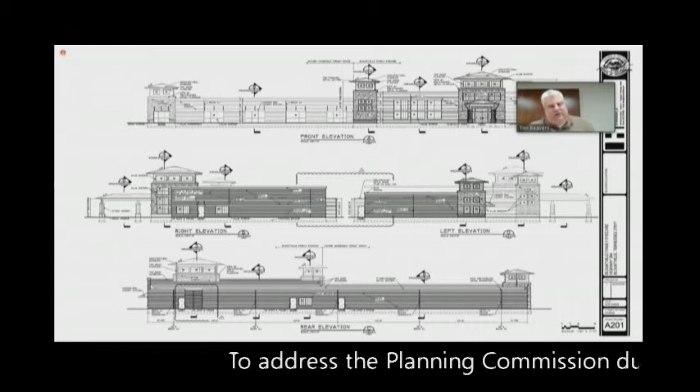It does meet all criteria to be a safe entrance there. The next slide shows the elevations proposed for the building. You can see it's a combination - once again in this overlay you have the rib siding, plain cinder block, unpainted walls, like the previous item we discussed with the special use permit. But these elevation views show they do have some stone and different types of siding.

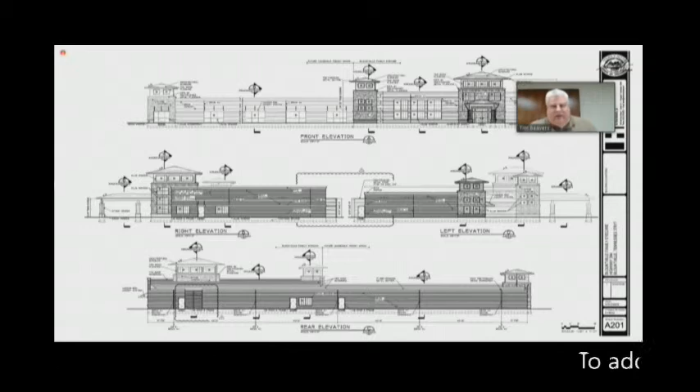We do have the architect online, Steve Hutton, who can answer any questions about building materials. He is part of this Zoom meeting.

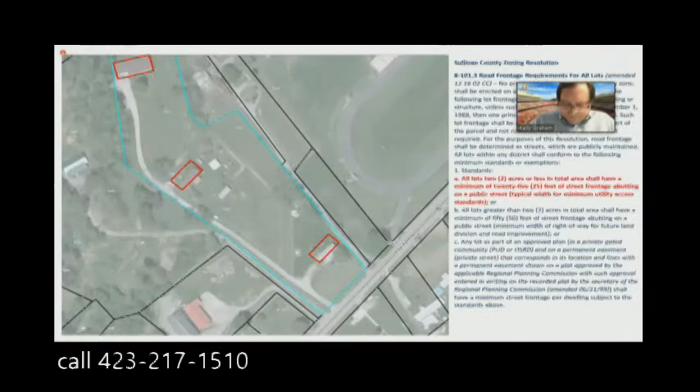Kelly, I keep expecting to hear John Ward though every time you come up. Oh God, I wish I had his voice. Well, you look a little bit like him maybe in his younger days. See ya. Bye. Thank you.

All right, other new business. Sullivan County text amendment recommendation.

Yes, Mr. Chairman, up next for your consideration is an amendment to the Sullivan County zoning ordinance regarding building permits. With that, I believe Sheriff is back and in a different scene, but back with us, and she can give the presentation.

Great backdrop, Sheriff. Yours is the best. I know, I'm so sorry everyone. I don't know what happened in my kitchen, but Tim, if you don't mind to take this, I might have somebody about to get loud. If y'all don't mind. This is a really pretty straight. I'll take care of it, Sheriff.